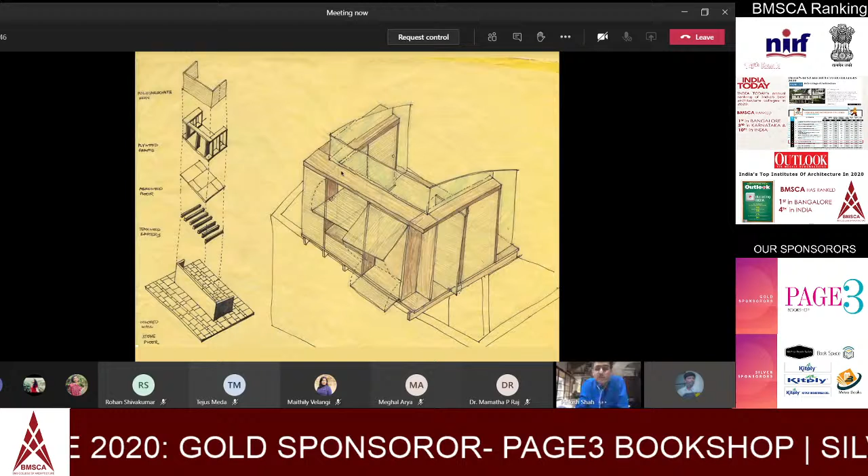We thought, what a fantastic opportunity to utilize that space, that volume within their home. What we did was perch this really lightweight structure on the existing wall. The room in some sense became a toy for the child, a space she could use and manipulate based on her whims, her demands, her moods, creating levels of privacy or interaction based on how she felt.

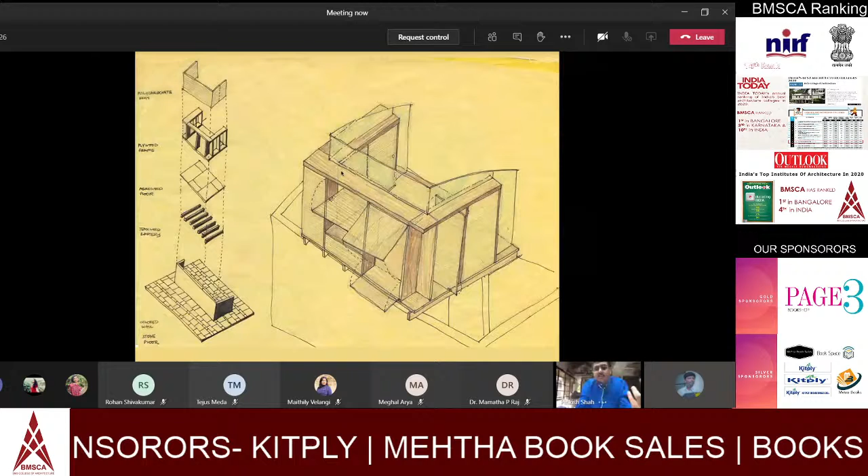Unlike a lot of our projects, these were all the drawings we did for the project, a quick sketch articulating what the whole project was about. There's an existing wall which screened the kitchen from the living room. We perched a series of really light wooden rafters, and the entire shell was done out of plywood made from rubber wood, encased eventually with a lightweight skin of opalescent polycarbonate, which glows with light depending on where the source of light is. A very simple project that becomes a fascinating tool for her to engage with that space.

We tucked away this staircase in the existing space of the wall itself, and this really tiny room pretty much provides for everything she needs, from the bed, the desk, the wardrobe, and everything that kids would need.

The second project is a house that we were called to do, and this project is really driven by the concern we see in society, and the tremendous amounts of waste that we as a society have been generating. You can look at Mumbai as the worst culprit in that sense, and this is expected to keep rising year on year. What can architects really do about this?

Is waste really a problem, or can we turn this notion of waste to start thinking of it as a resource instead of waste? Does architecture really have a role to play? Can we change our negative perception of waste that we have? This is especially true in the Indian context.

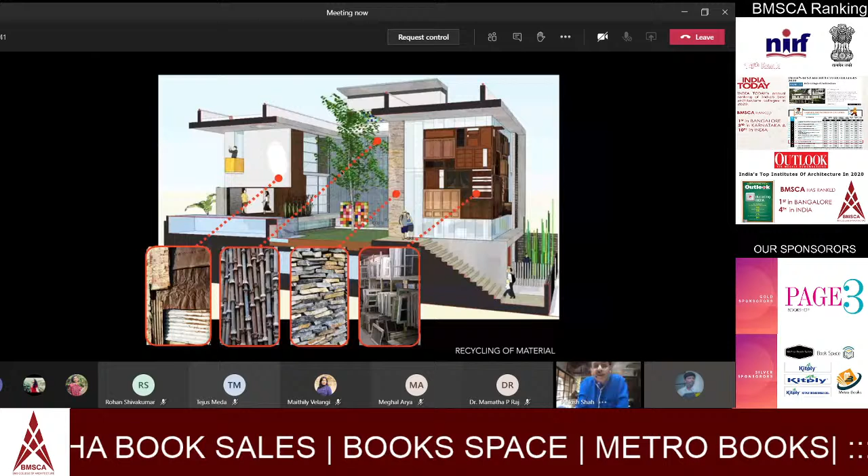So before I go on, there's this quick little video that shows you the context of the house. So I think let it play and I can continue then.

Yes, I think that gives you a quick overview of the entire house.

So again, coming back to this, these were early explorations for the facade, where we are trying to look at the idea of recycling windows, and that's what it ended up being. Similar but very different in some sense, and that process was really interesting.

Because the windows were eventually found by our client over many weekly visits to different parts of Mumbai, and eventually we discovered this place called Deonar, which is in South Mumbai, where everything that's broken down in the city actually ends up in those recycling yards there. And over many weekends we would go there. We actually picked every window and door, would measure it, would photograph it, document it, and figure out a way to assemble this entire collage of windows together.

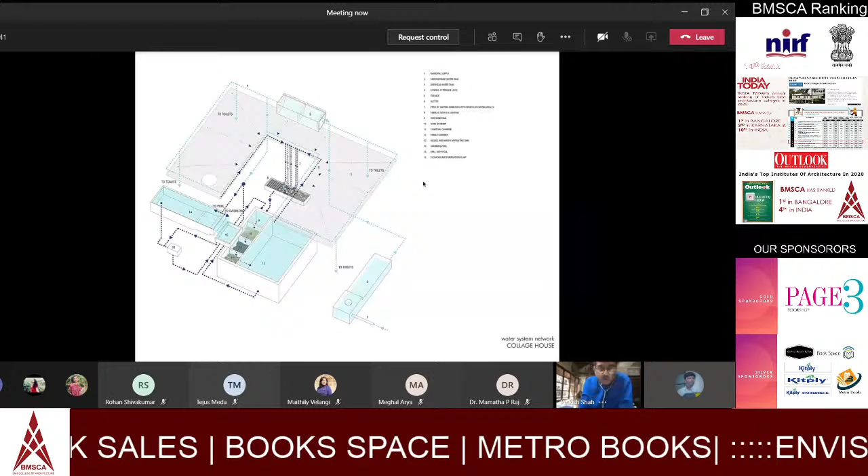contradictory demands, where at one point one is trying to recycle and save water, but also the aspirations of a client to have a lap pool. But I think as architects we can really make these opposites work in some sense, if we figure out a way to carefully create the system where the water is channelized from one source to the other and then recycled to allow for clients to have these luxuries, so to speak.

The courtyard is an idea that has existed in traditional Indian architecture. It's a great climatic device which works here as well. In this case, we had 4 generations of families living here, from a 90-year-old grandmother to a kid who was just born, and the courtyard becomes the place which allows the family to negotiate each other, to allow each one their space.

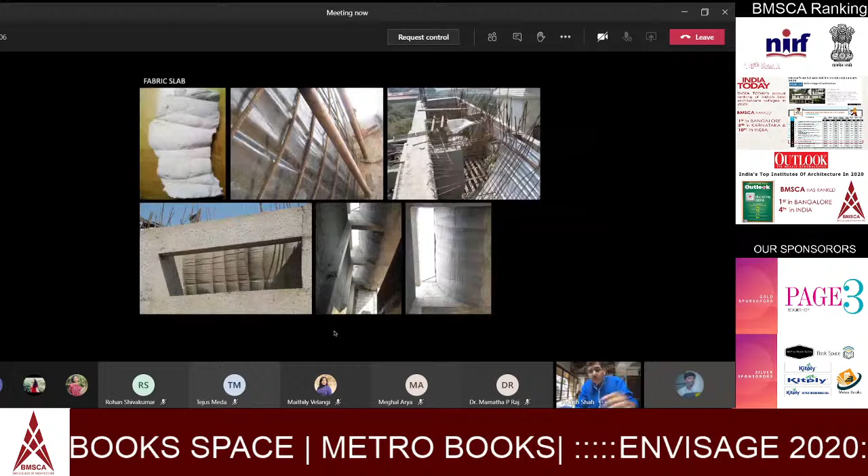I'm not going to get into the details of everything - there's a story behind everything. There's an extensive amount of material and detailing of furniture and architectural elements with a variety of different materials.

They're about 100 years old, from houses in Kerala. They get used structurally, actually bolted to the columns below, with steel stub columns above, to create this fascinating pavilion, which is a real contrast between the old and new.

The wood begins to contrast with the steel, the stainless steel of the roof, and the glass of the pavilion itself. That's really a place that then gives you these views outwards to the water's edge.

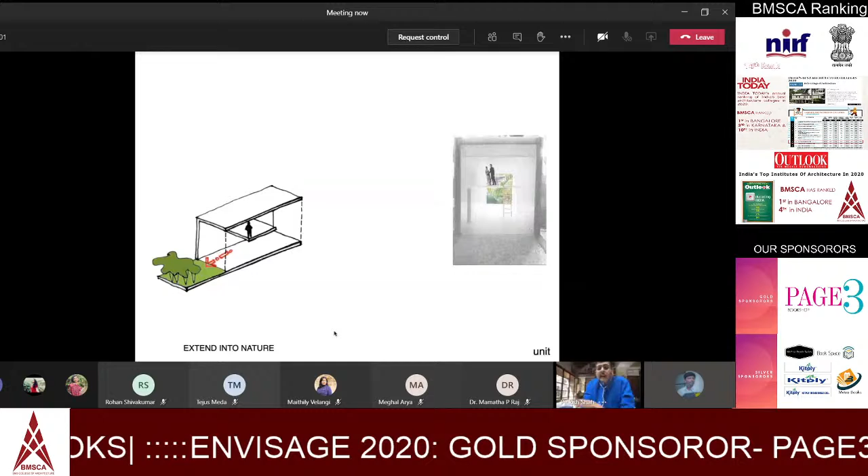Added to that idea, we said, what if every home actually had a garden, however small it may be, attached to itself? So these three things became the fundamental building blocks for the housing.

We used that to structure five different sizes of units, which went from 40 square meters to 195 square meters, becoming as big as a villa within the whole community. So it's like a 1.5-bedroom, 2.5-bedroom, 3-bedroom, and then a 5-bedroom, giving this variety of unit types that emerge.

What we did is that all of these different types are very strictly controlled by a module that governs them.

There's a 3.5-meter module that controls everything, from the offices and shops to even the banquet hall, which became part of the public program. In the initial stages, the idea was to produce these modules off-site and then get them to site in a prefabricated manner, installing them in some sense. That didn't happen because the scale of the project wasn't that large, but they still have that, which creates a wonderful scaling across the site. So no matter how big or small your home is, you seem to have a uniform scale that begins to govern your experience across the site.

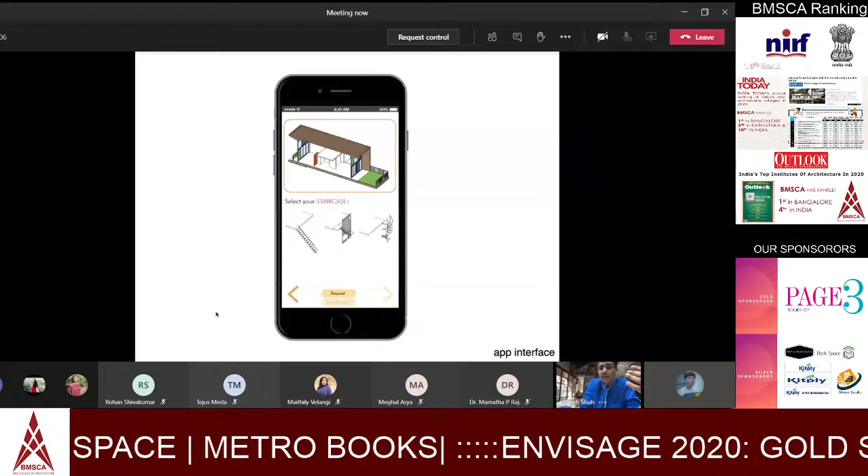What really happens is that you could pick from this matrix to create, in some sense, your own version of your house. What we had suggested to the client was to actually create an app that becomes interactive, allowing home buyers to keep playing around till they could figure out for themselves what is my house, or what is the ideal version of my house. Here you can see they're actually able to pick each of these components till they produce their own version of the house they can call home.

So what we did then is start with this very basic unit that I just explained, this 3.5 meter by 10 meter unit. What that does is grow an arm which adds all the service spaces. It interlocks with another one of these, creates a service court within. We quickly array those across the whole thing and open these out in the middle to allow for vision, access, and breeze to pass through. We stagger these based on site conditions, based on the location of a tree that may come in front of us, or to make sure there are no overlapping views, and then stack these on the upper level.

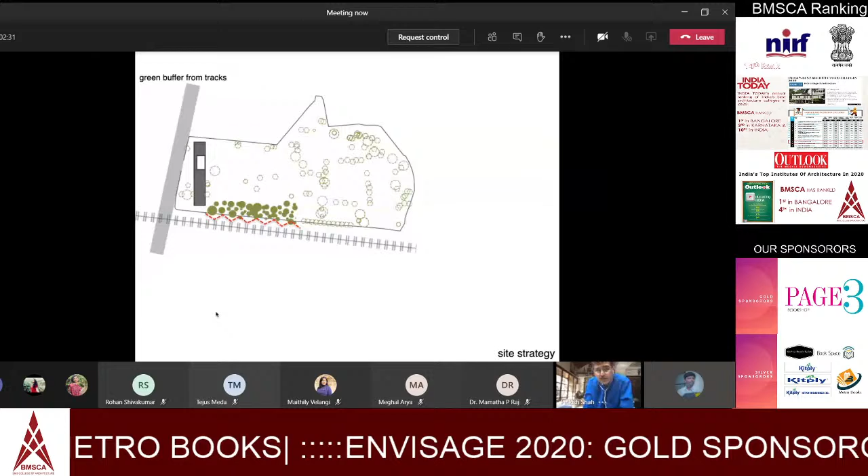The client had this perception that units very close to the railway line would not sell, so we set them back a little bit by creating this green buffer. And what that really does is create this street in the middle, done pretty much like the units I just explained.

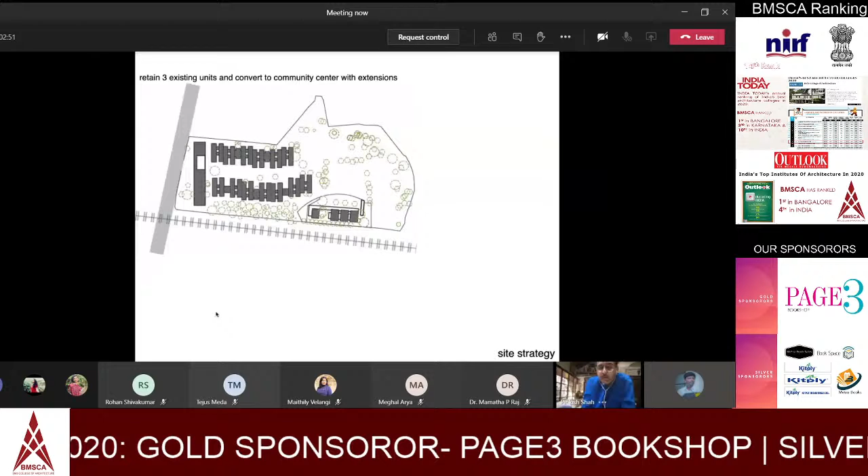The 3 you see on the bottom there are actually the 3 units we managed to save, which became a small community center there.

The back side of the site, which I explained was 1.5 meters above the general level, became this raised rear courtyard around which more units were arranged. So you got this configuration of a street and a courtyard that configured the site.

And the larger villas then sat within that. So you have this mix, this multitude of varied housing sizes, all interspersed across the site, and this balance between private open space and public open space.

You can see that the yellow, which is the public open space, is largely contiguous, which people could use, both vehicular or allowing you to traverse the site as you feel across the entire thing.

And that's at the end what really emerges - that's the site plan, which shows all the different components coming together, with that scrolling section at the back, at the bottom, which you will see slowly rises to become this raised courtyard in the middle at the back of the site.

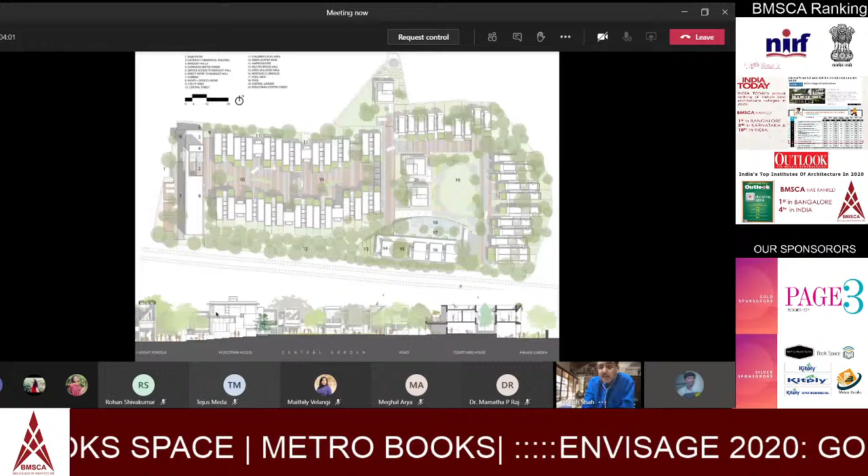So quickly running through the photographs, that's the entry building through which you enter. The left side is actually the banquet hall area, which you could enter independently without disturbing the community. And these exposed staircases, which we created to take people up to the multiple levels.

More details of the entrance building itself. These are the banquet halls themselves, looking outward from the inner space. This is the upper levels of the shops, of the offices, where we've used these colorful super graphics to draw attention to them.

And these are the units as they build out, and you can actually see the modularity or the regularity of the tubes themselves, but the infills on them are all varied - you have this concrete railing or a metal railing, or a Corten steel screen, or a wooden screen, and this kind of variety that exists.

This is the central street. At the center, roughly at the center, we connected them across with a pergola to break that scale of that linear street.

And on the right, you can see these bridge units, which are connected at the top but completely open underneath. Each of these bridge units leads to a small play area for toddlers with slides and seesaws and the like. Each of the houses is entered through this small little porch on the outside.

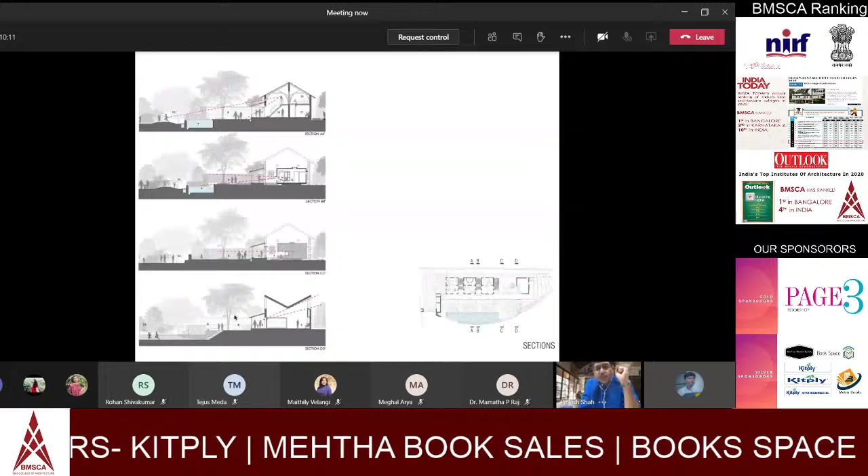These are sections cut through different parts of this. The first one shows the new addition of the loft and how you're able to get this relation from that loft and the lower level to the pool deck, the pool, and that green space outside. The second one shows the small connecting units between the existing houses, where the views open out only when you sit down over there.

And the last one shows you the kind of expansive outward views that you get from within the new addition of the multi-purpose hall itself. So that's the plan and the elevation of how it all comes together.

This basically accommodates the central area, which is like a wet zone. There's a steam room and a sauna and changing rooms, typical requirements for things like this. And there's a space to exercise.

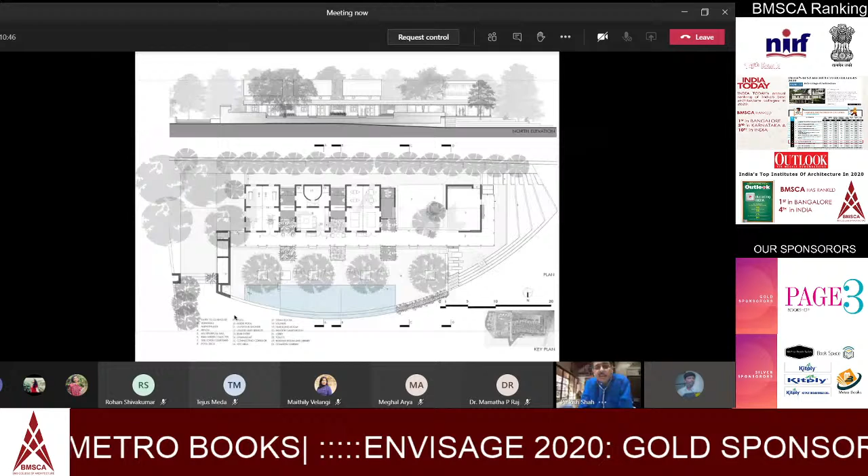You see those three buildings all connected by that linear veranda opening up onto the pool deck, and then the pool itself spills over into that green space. So the veranda then becomes the most important thing, not the building itself.

Really interesting here, because all the stone for the veranda, the bases, the wood itself, the columns, the rafters—everything was repurposed from the demolition of the old buildings that existed on site. So we were actually able to create this entire addition without using much new material, except of course the new hall itself.

So we were very conscious of the new additions. We really wanted them to contrast and stand out from the older stuff. So they're made in board form concrete.

You can actually see the casting of the concrete in these thin 4-inch strips. And again, the scale changes at every one of these units. Only when you sit down are you able to relate to this outside space. So there's this sharp contrast between what is old and new.

This is the new addition, the loft that we added here. You can see that the two trusses on both sides are connected to a steel member that is suspended from the top. This is the addition of a new steel loft and a steel staircase.

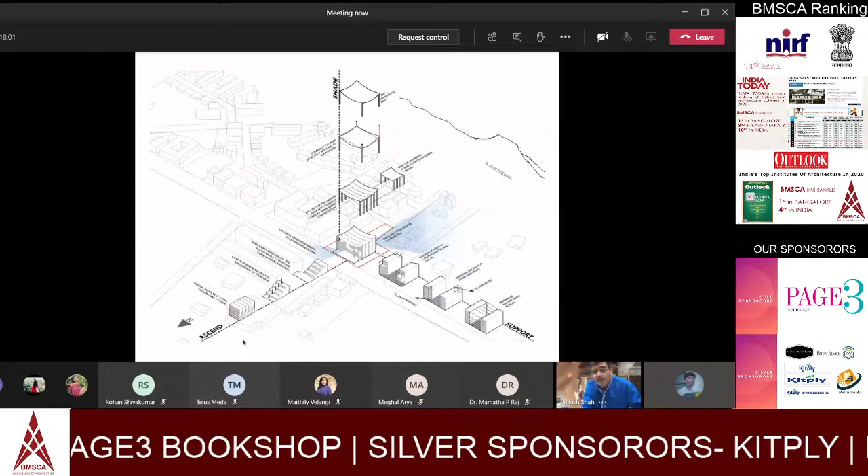The upper, if you see the vertical strand, is basically talking about this idea of shade under this kind of canopy, which protects and shields the site in some sense. The one on the left begins to talk about the idea of this ascent upwards, looking at the series of terraces that slowly take you up the mountain, from where you can see the blue opening up of views towards Ajinkyatara.

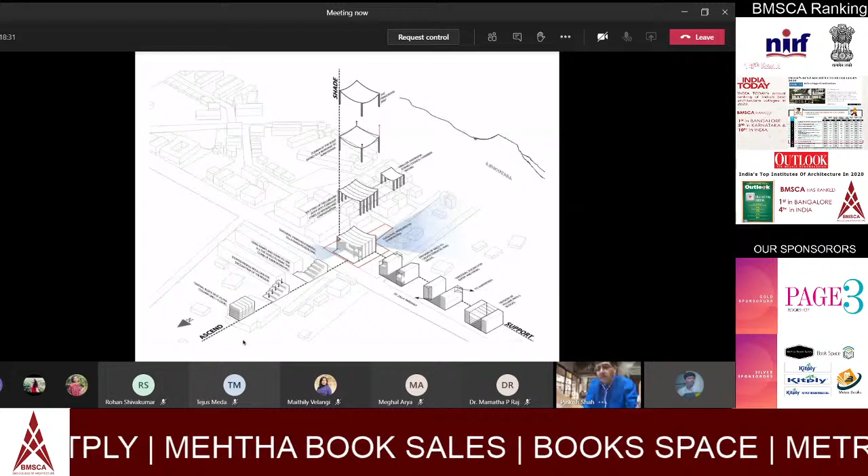And then the building, in that sense, is supported, or governance is supported, by these two arms on either side, which are just this armature within which democracy in some sense plays out. So that's what we came up with.

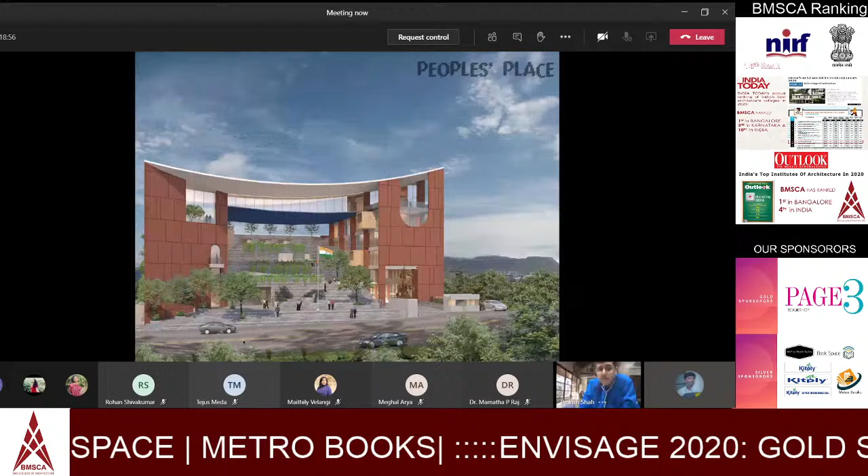Like I mentioned, these two arms form a light-looking roof which sags above, and the central space is completely open to the public 24/7 in that sense. So the offices could actually shut at night, but the plaza and the terraces become a place for people to gather for events, functions, or just become a new place for the city to meet.

So based on all the requirements that they had given us, we clustered them into these 6 broad volume categories, taking VIPs and restricted security access right to the top, but at the same time opening up the lower floors to very public amenities, which then kept staggering and moving up the entire building.

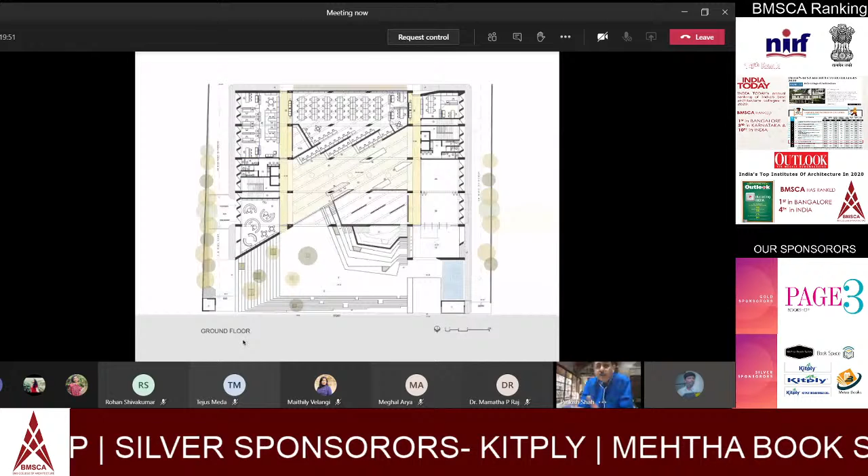So that's the ground floor of the project. You enter through this flight of steps, which creates a plaza in the front, and till that red line, that entire place is very public. So we introduced new programs like a children's civic library, where this fear of the government is something you can start beginning to remove.

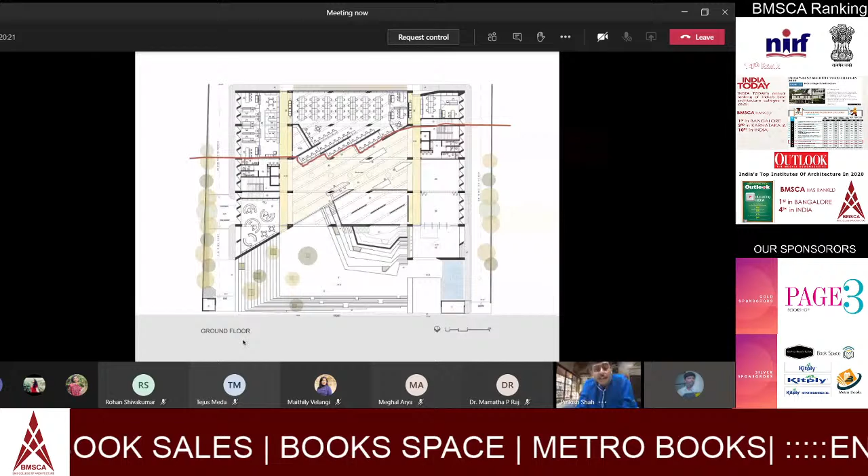In children. This is not something that was asked for in the brief, but we thought it was important. So the left side becomes a kind of library that children could come to and learn about governance and things like that. And then there were these halls on the right side which became multi-purpose spaces for citizens to come and hold events and functions.

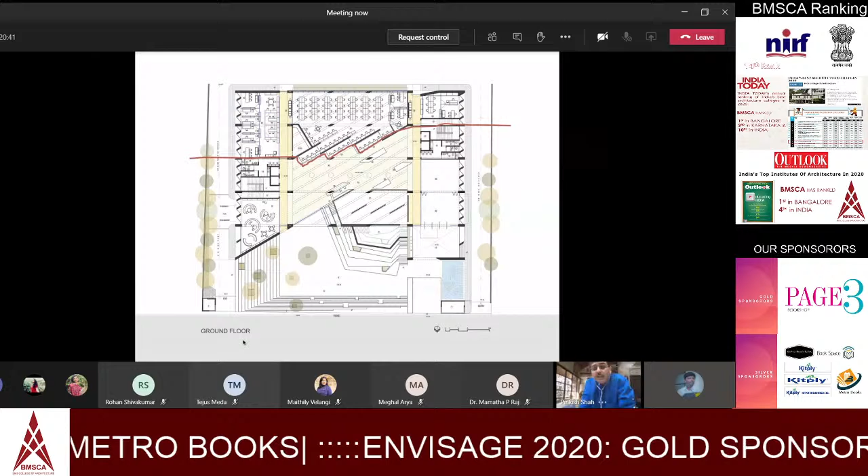There's a gallery space also in the middle, and beyond the red line is basically security-driven spaces. So they had a very large requirement for storage spaces, for a lot of filing and dead material in that sense, which we did very carefully—we hid that below the staircase that is running up through the center.

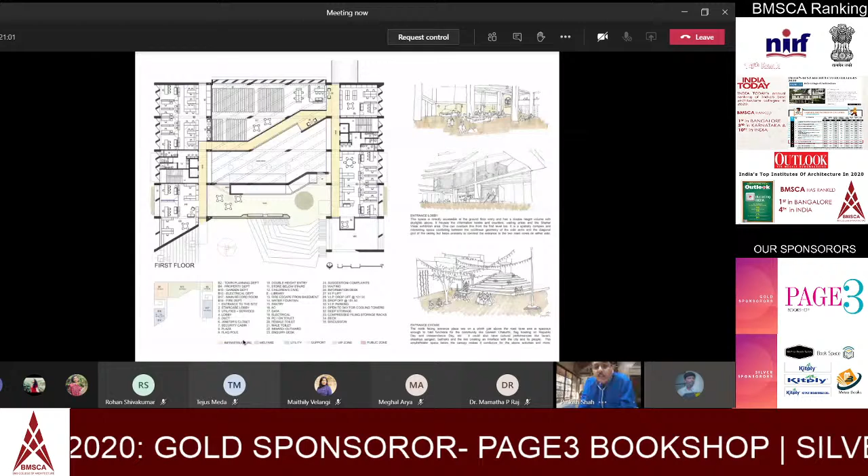So that's another view of the same, and you see in the central part of the building where it becomes just a large place for compressed filing.

Interestingly, the two cores are not symmetrical, so we staggered them a little bit, as in the top right diagram. So you create these smaller neighborhoods within the office—you have a very large space, a medium-sized space, and a small space. You don't get these anonymous-looking endless office floors that have become de rigueur in most corporate projects.

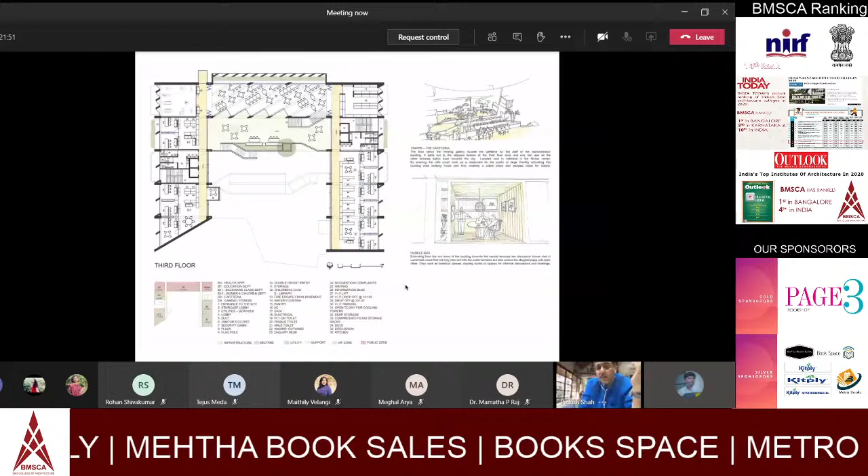And you begin to climb up, and right at the top, one last floor below the top, we programmed the public restaurant or cafeteria as a public restaurant, which could remain open after hours as well, drawing people up to that place.

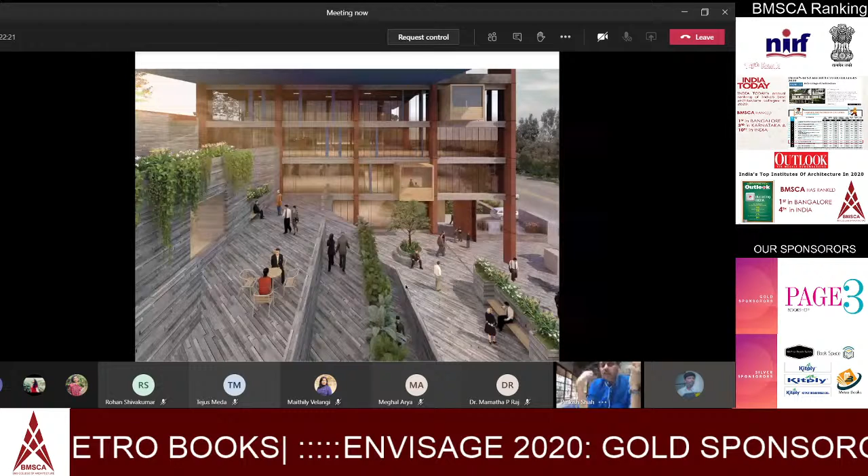These are some of the public terraces. The idea here was very simple—that Satara has a beautiful climate, and the idea was that this could draw people from within, government officials, out onto these terraces and decks to actually start communicating with citizens, and citizens would feel less intimidated by having to step into a public space.

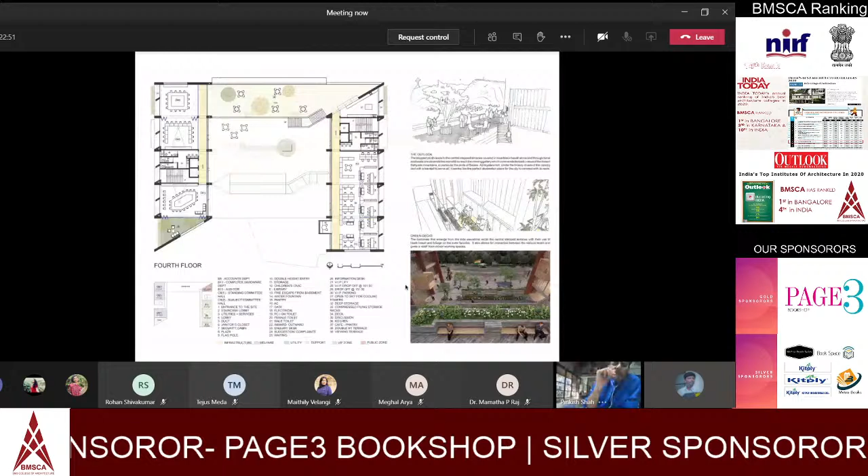Also, the thinness of the building allows you to look right through these buildings. You almost make governance transparent, and you make governance at work visible in some sense to people around you. And then this is the plan where you reach the final terrace and the building actually just cuts away, opening up those views diagonally up towards Ajinkyatara Fort.

And the top two levels, of course, is the chamber itself, along with all the VIP activities and that's really what happens on the sides. And the stepping notion of the inside is then begun to be reflected on the outsides as well.

Last project, very, very quickly, going to run through this. This was the first project that we ever did. This is 20 years old now. I just pulled it out of the bag because I think there were some important lessons for us that we learned here.

And how does one really make sense of this? How does one create a city out of fragments like this? I think what this project demonstrates is this really micro fragment of the city—that what one needs to begin to do is not really look at the solids, but to really start looking at the voids that are formed in between these buildings, and how the voids formed can become more meaningful.

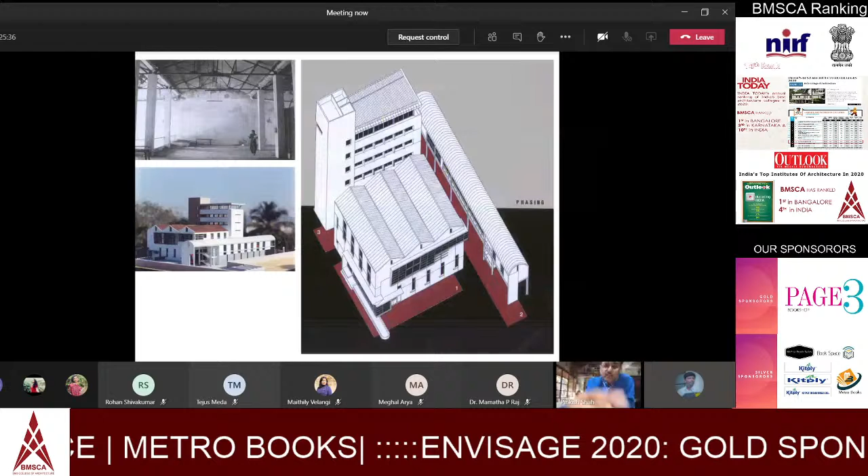Then we said we can take the additional time we have to actually create two more buildings. You can see that in the drawing which shows phasing, or the model image. We created one tower, and then a smaller, thin, long utilities building. So the three buildings are all different. The middle one, the plastics factory, becomes a combination of steel and an existing concrete building with additional floors and movement spaces in steel. The utilities building is an all-steel building, and the tower is an all-concrete tower.

It was fantastic learning for us to look at all these three things, but it also shows you how three different building types can actually coexist.

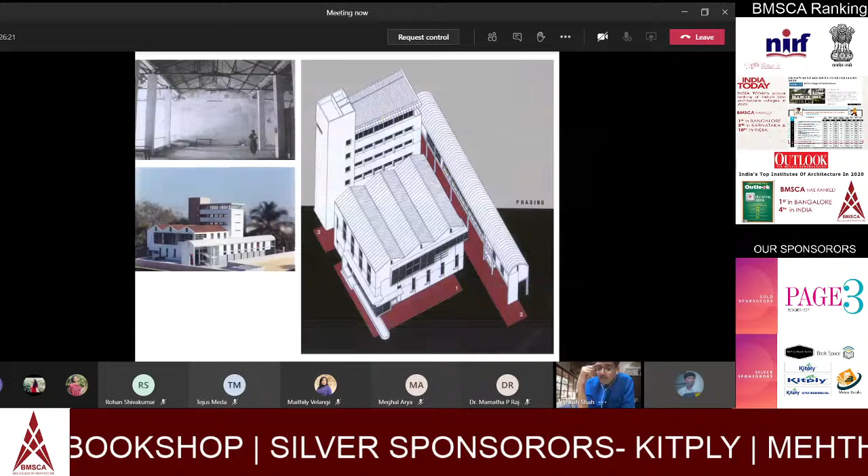What is really interesting, picking up again on the hybridization of the program, is that all three buildings at the lower floor work as a workshop. It's a very interesting model - an automobile finance company that is also into leasing of cars and maintenance of those cars and others. So you have a workshop, a very blue collar space which is greasy and relatively messy, but you also have people dealing with finance, in ties and suits, sitting on some of the upper floors.

The tower then became a space the company saw as a space they could expand into as they grew. So whilst we did it, it was actually rented out to a software firm. You begin to get all these multiple hybrid programs sitting on one site together.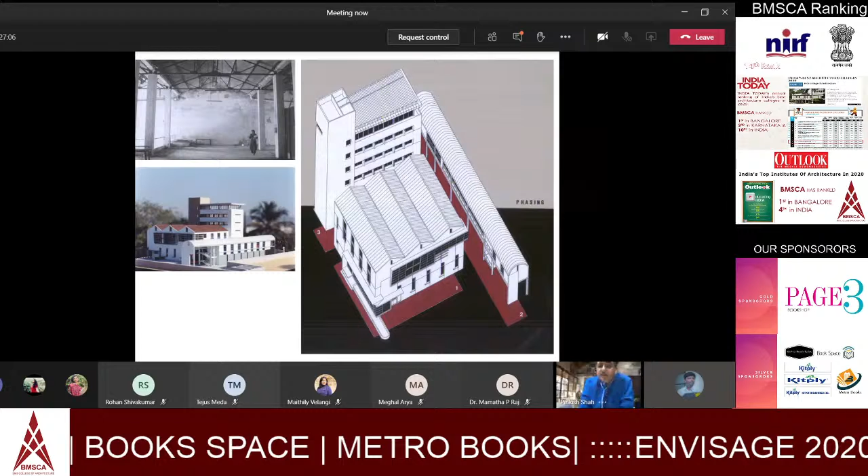I think that was really interesting for us, doing this about 20 years back when we had just come back from the US after working and studying there.

What we realized is that the factory space was this very generic space, and it would see transformation over time with modular furniture being configured and reconfigured constantly. What we thought was very important was to define that, to have things which would really hold this space together.

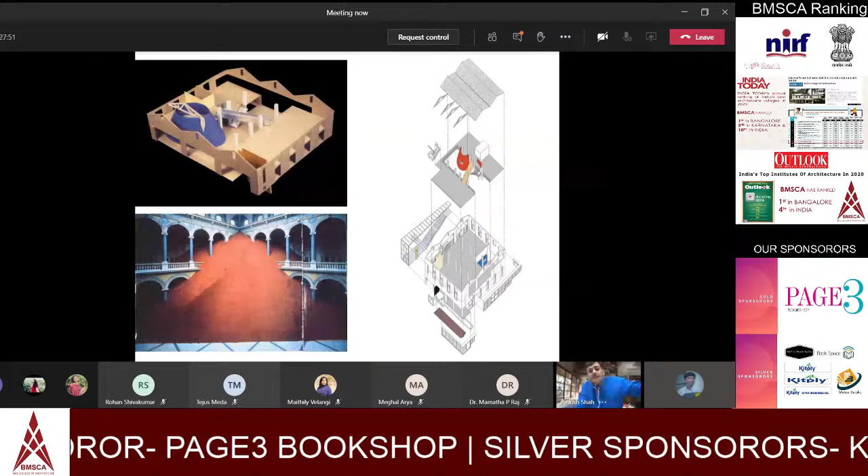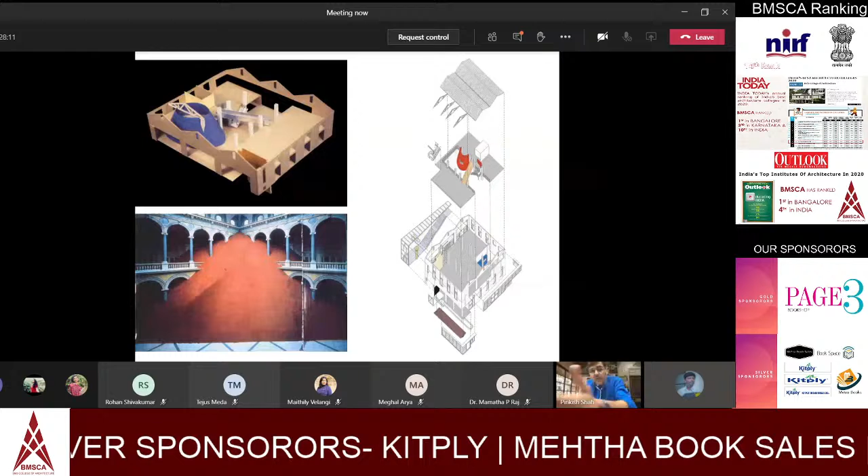We came up with this idea of these totems, these totemic objects placed within this large volume, which then in some sense, even though they contrast with the volume, actually call out the nature of the space far more. It's very interesting because we discovered this image by a Czech artist who had created an installation within an old building, and what we seem to have done is very similar - this was actually found post fact, but interesting.

Here you can see the section of the tower and the older industrial building, and that little space in between, which basically becomes an entry point where you can begin to go to all these three different things.

These are some of the objects we introduced. Everything newly done within is done in steel, fully exposed. We've exposed all the trusses, the lighting, the air conditioning, everything is actually exposed here, and so are all the additions in detail.

This is like a bridge that crosses the central atrium, and it's all structural. Every bit you see has a structural purpose in some sense, as well as the detailing of the staircases and the bridges.

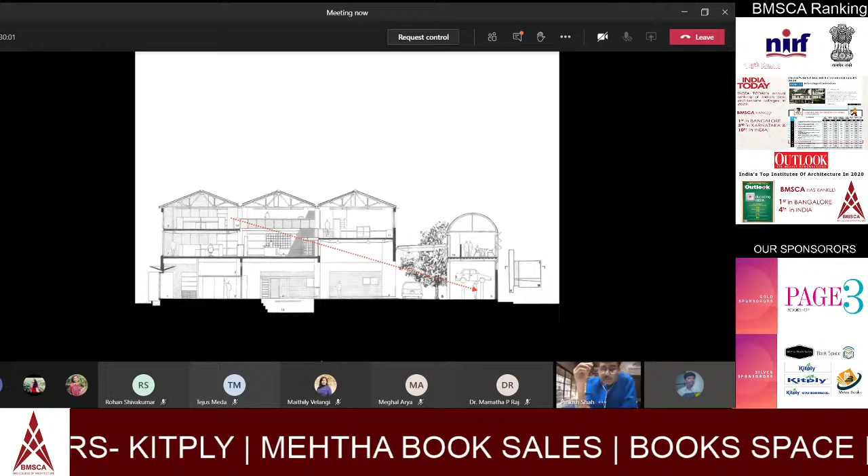This was something the CEO of the company told us in our very first meeting: that at no point do I want the white collar workers, the corporate staff, to forget that they exist because of the workshop and the maintenance that we offer our clients. So there's this continuity and visibility.

We talk a lot about visibility of the other now, and about trying to blur boundaries between different classes of people. This was something we had done very consciously, where from the office space above one could really participate in the goings-on of the workshop.

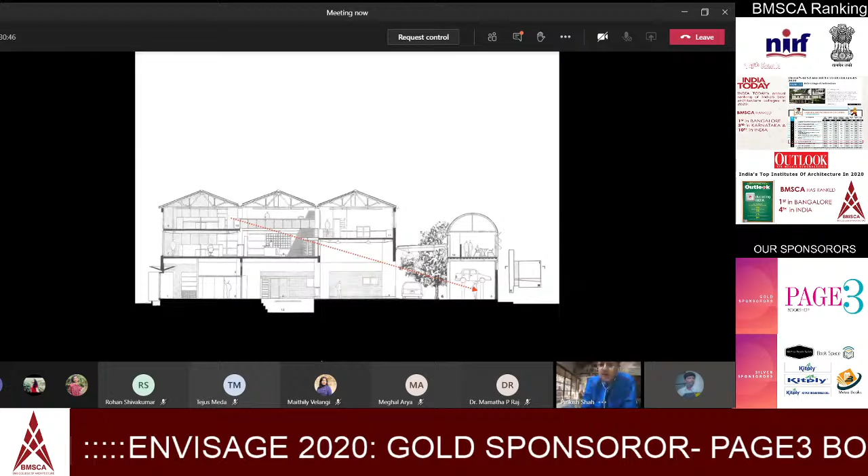You can see that on the bottom right of this image, like cars being repaired below. So this blurring of boundaries between these different parts of the office happens in some sense.

This is the utility building, a simple vaulted space, linear passage, and again it looks down into that space between the buildings. This is a section cut through that gap between the tower and the older plastics factory.

What we've done is thread this staircase that takes you to all three buildings. You can go right or left to either building, or climb up and enter the utilities building here. So it becomes this distribution point to go across all of these spaces.

You can see this is a skylit space. It becomes like a street, a public space where people hang out, with these bridges crisscrossing all of them. This is from the other side, and that's the tower.

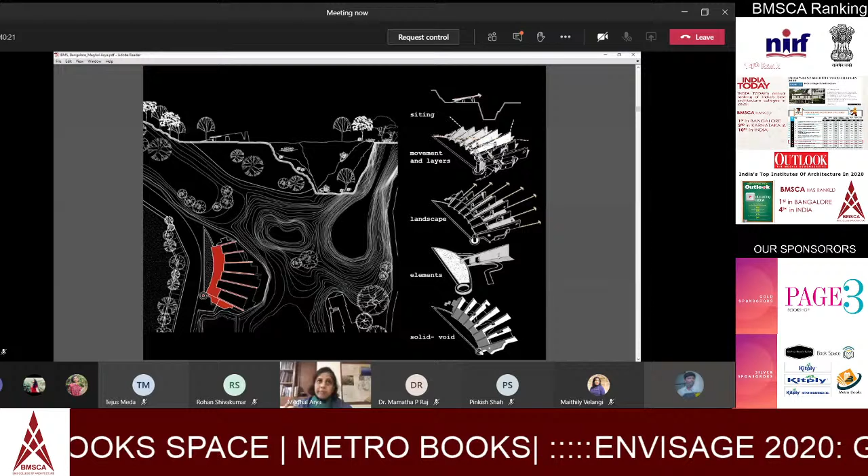One of the things the government of Rajasthan wanted to do was create a tourism circuit around the life of Rana Pratap, a king in the Mewar region who was always on the run, and one of the very few kings in Rajasthan who did not have an opportunity to construct anything. He left behind no edifice or presence of his rule, and yet he was one of the most celebrated of all the royals.

So the government wanted to capture his life by marking specific locations where significant events occurred, including fights with the Mughals or where he was coronated. These two pavilions are located in such sites, which are actually in the middle of nowhere. For us, it was about interpreting the life of Rana Pratap as something very simple but frugal, lived with a certain degree of hardship and robustness.

We designed the first pavilion as a series of 7 walls, interpreting his war with the Mughals, which happened across 7 valleys. These 7 walls have been constructed overlooking the valley, and on the other side you have the hill, with the building sitting between these two realms, creating a tension between the inside and the outside, something built and something not built, trying to recollect or create a sense of a ruin.

So you don't really know whether this project is complete or not. In fact, one of the MLAs of the area asked us when we were going to put some chhatris on top of this to complete the project. But this is it—this was how it was meant to be.

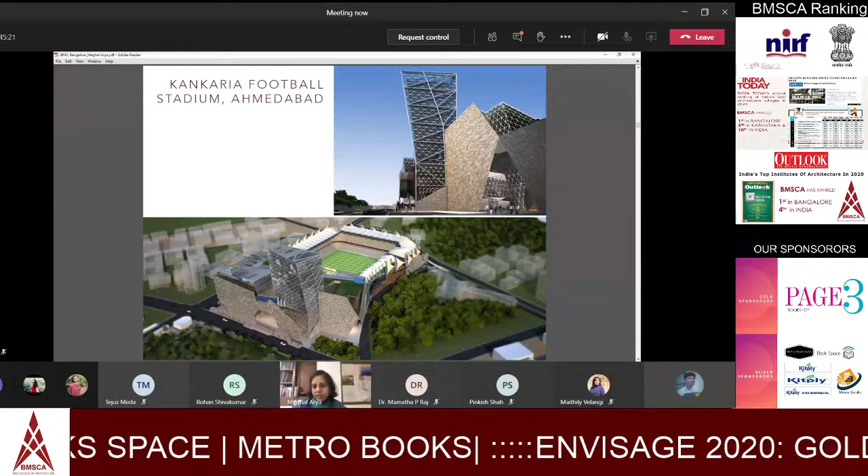One of the most important learnings we got from this project is to be able to handle a large variety of aspects that bring architecture together. So you had something like 35 odd consultants trying to help put together all kinds of services, utilities, technology, materials, even sports advisors, and to be able to communicate with all of them, integrate their requirements while still asserting a certain quality of the spatial configuration, while ensuring that in the scale and largeness of this project, the intimate and the human is not lost.

This was a fantastic learning for us in how to look at the idea of hybrid programs. You have a sports facility, but then also hospitality, a hotel, a multiplex, and a sports club. So the idea of hybrid program also became a very important learning for us in this project.

This project, however, remained unbuilt, but we took quite a bit of learning from this into our next set of projects. Most of these next projects are in the realm of educational institutions.

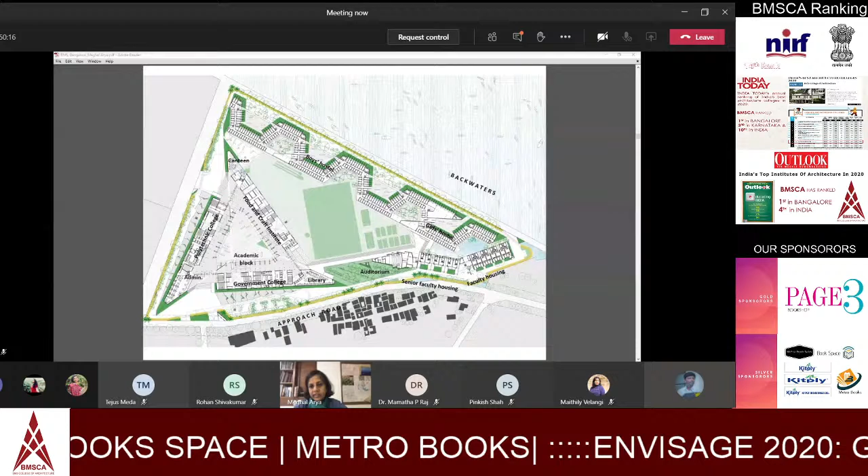We were hoping to break this notion of individual silos and create connections to foster multidisciplinary learning. This is not something that happens easily in government institutions, and we hope architecture can enable such learning. On the other edge, we have the hostels looking at the backwaters, creating smaller courtyards. On the lower end, towards the urban settlement, we have the faculty housing that would connect them to the other residents of the area.

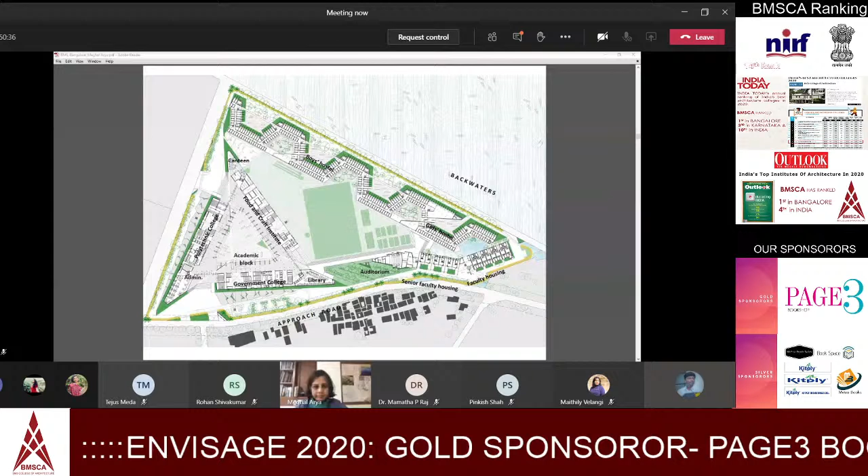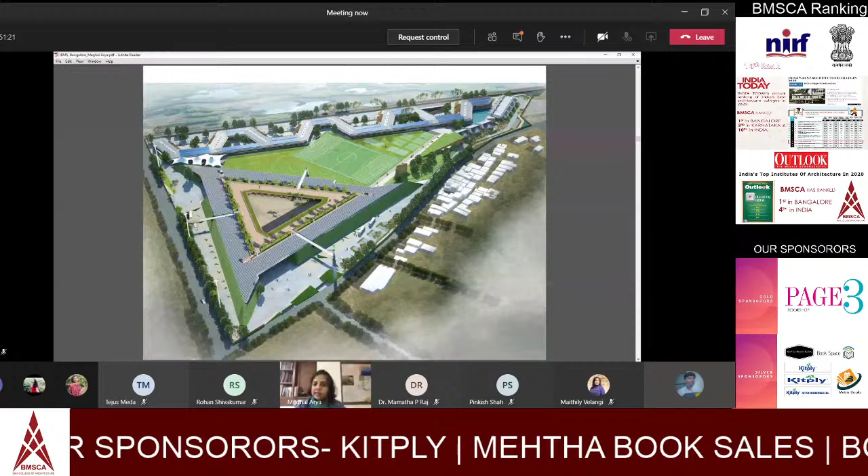In terms of the massing, we had to take care of a few things. One, this was an island frequently hit by cyclonic winds, so we had to keep it a highly protected environment, which means we made this highly introverted. We also kept it very low because it came within the cone of the airport, so you couldn't rise high. This was a very low two-storied building spread on the ground and yet compacted enough to create spaces for sports facilities for these young people in the college. Those sports facilities also became a way to separate the residential area from the university area.

And finally, you have this internal courtyard with many semi-open spaces looking into it, and you can easily imagine students moving through these spaces, walking through the courtyards, creating an environment of learning and college life.

We tried to work a little bit with materials in a way that would not be simply paint and plaster, which is what most government officers were used to looking at. It was quite a bit of effort to bring in exposed RCC to create certain patterns that would create an environment of diversity and a visual palette for the experience of the students. These cross connections across the courtyard and through different spaces were also hoped to be a way where you can talk about learning beyond the classroom.

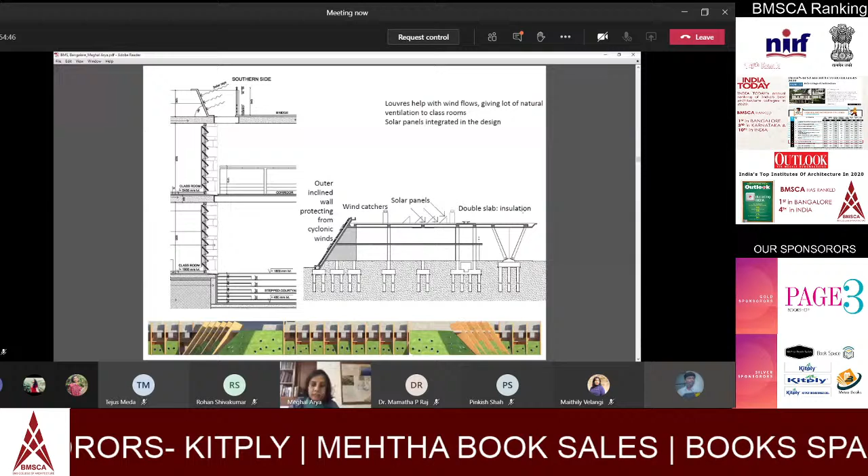We also put in place certain measures for other climatic conditions other than the cyclone. We put up some solar panels for harvesting solar energy, and we've made sure that most of the spaces have protected doors and windows so that the lashing during the cyclone is not very harsh on the building itself. We also have a double slab on the topmost level for insulation.

Once again, a large open space for the gathering of students.

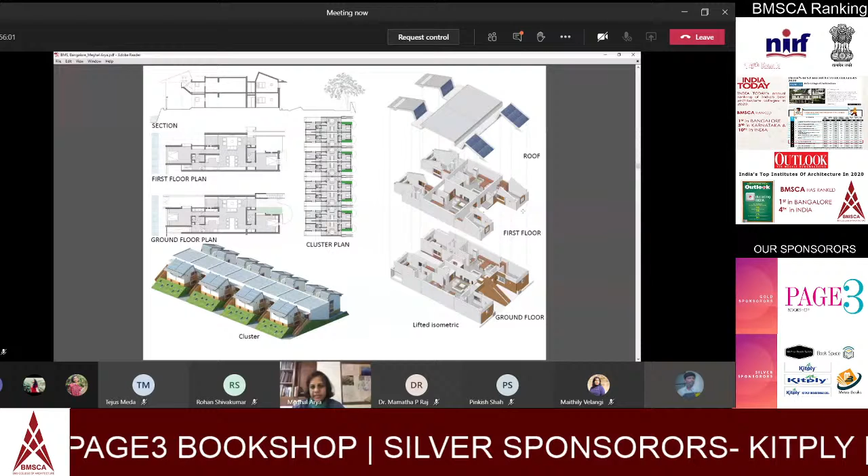We also had to do the housing in these projects, so this was the housing for the faculty, small clusters, and it followed the same language of protected inside with these landscape mounds, which to some extent also referred to the fort on the island. These were known as the tenement or twin units, which shared walls in order to reduce the impact of the heat and yet give a continuous flow, because this is once again a hot and humid climate.

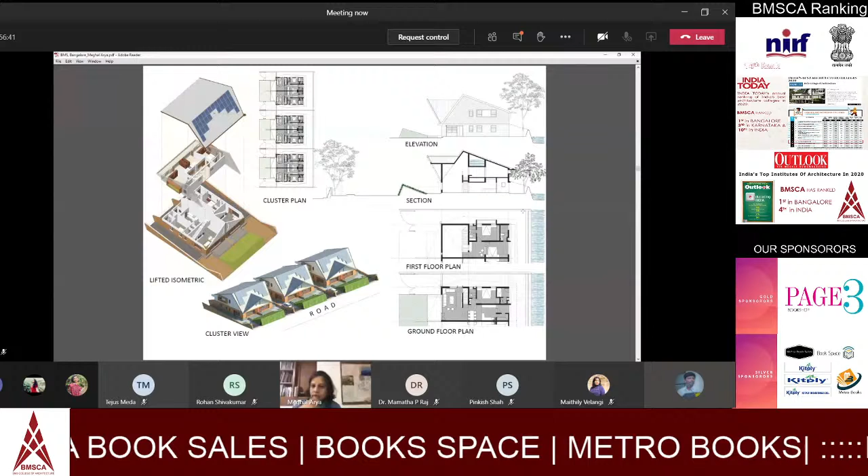And they had a shared staircase from outside. This kind of space which is created is a double volume with a space looking in, the water tank incorporated within that, and all of that in a way becomes one singular unit. This is for the larger faculty housing.

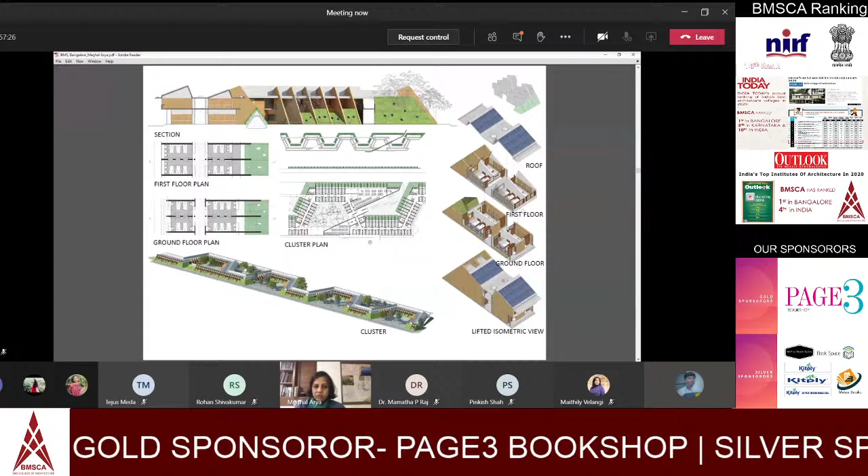And finally the hostels. The hostels were also designed to have their own small courtyards which opened out, although it's a doubly loaded corridor with the problems of all doubly loaded corridors. We've tried to ensure there is enough light and ventilation within the rooms, and the interaction space between the girls and boys hostel becomes the dining area. So on one side is the boys dining, and on the other side is the girls dining, with certain controls in between, because that is what was required of the program.

So you get this kind of space for students to hang out after classes and create certain spaces for their evening activities, apart from the sports facilities that have been provided. And this is the internal courtyard with corridors overlooking the spaces.

The other project is a small project in the north of Ahmedabad, again a very hot but not humid climate. This was the administrative block for the Agriculture University in Dantiwada. Since it was an agriculture university, the idea of how the project communicates with the land was what was at the back of our minds.

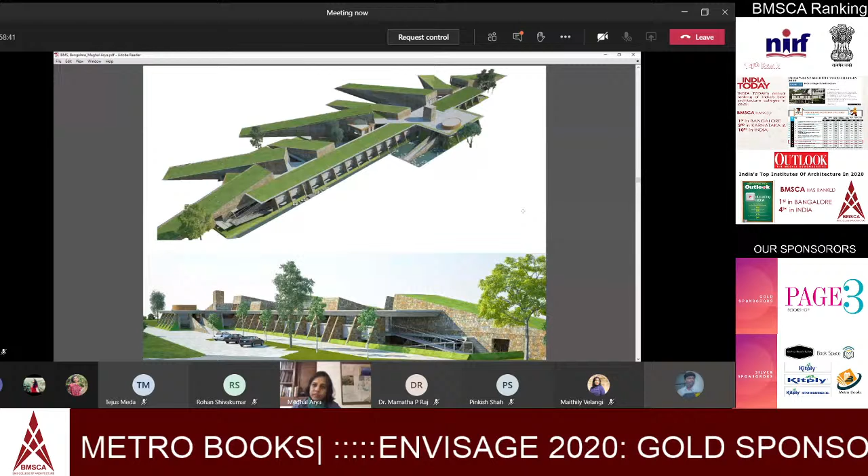So this is what came about as part of the project: one linear passage kind of space, and at the head of it was the Vice Chancellor's space. The Vice Chancellor was to communicate with 7 different departments, each headed by a dean. So those 7 or 8 departments became units which moved into the landscape with certain sunken courtyards.

This took care of the extremely hot climate of Dantewada. At the same time, it allowed the land and the farms to move up onto the terraces, merging the building completely with the landscape. So it almost tried to become a non-building from the side of the farms.

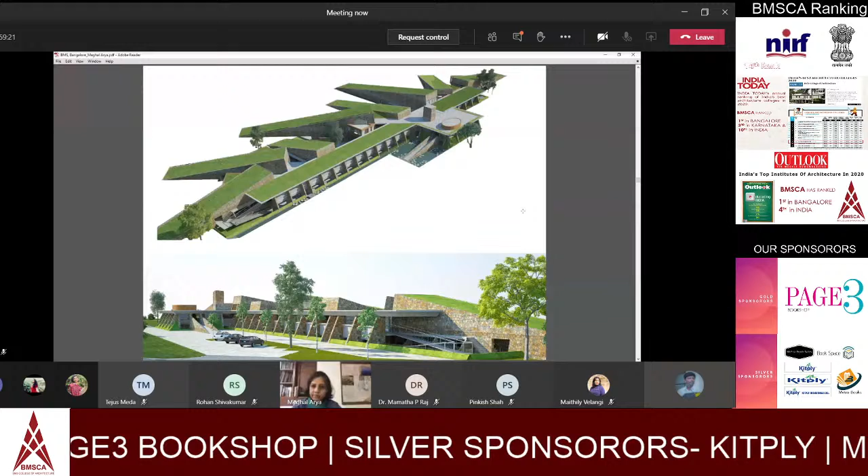And this is how it is in its final form, where half of the building is sunk below ground level. It is made in stone. We experimented with stone jaalis which act as the grills. It's sometimes quite a task to make many government contractors work with this kind of detailing.

But over a period of time, we found that good conversation most often brings them on board, and they are then quite happy to put in the effort to make it work. These are internal spaces, again as required, with a lot of movement. We need to give space for many students who will be rushing around asking for things to be resolved in various departments - the registrar, accounts, and all different kinds of examinations, all brought together here.

So these are the various projects. What I will now do is run you through a few of the competition projects we've done - not necessarily always winning, but still very useful to the office as R&D. We look at competitions as research and development.

There are ideas which are opened up, explored and experimented with. We always keep those with us so that if there's another moment where such an idea can be suitable or relevant, it comes back. So we do a lot of competitions, 2, 3, 4 every year, and maybe you win some and maybe you don't, but you learn a lot.

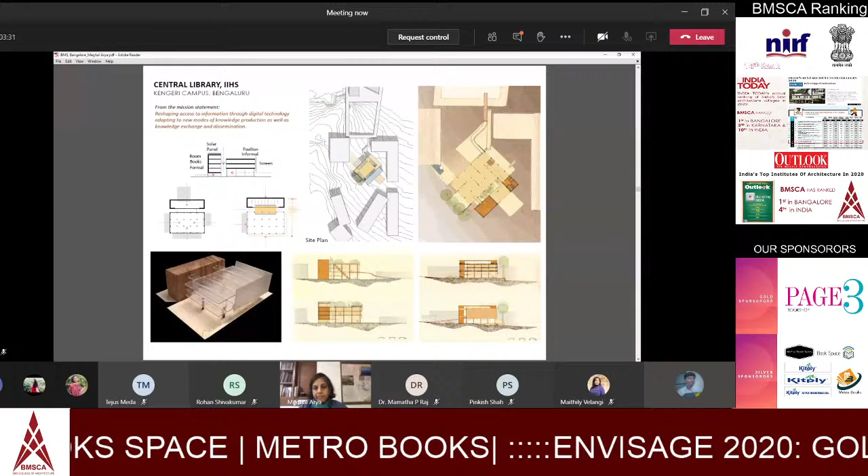What you see in the dark is where the repository of books is, with many levels layered based on material and kind of books, but also in terms of archival material, rare books and rare maps, because this is an institution for habitat studies, so they have a good collection of large maps.

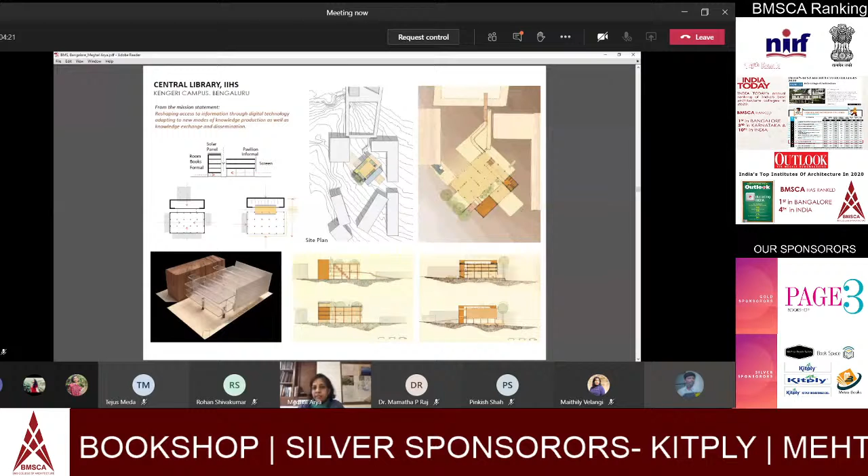Those kinds of things all come in the darker spaces. The lower levels are for interaction and multimedia presentations and exhibitions, whereas on the top layer we have the reading rooms, the reading carrels, and administrative spaces. So it's a very simple diagram, and this is reiterating that for us, from the diagram we add layers of requirement in order to enrich the experiences. The diagram doesn't automatically become the building, but goes through many transformations, additions, and modifications in order to reach the final design.

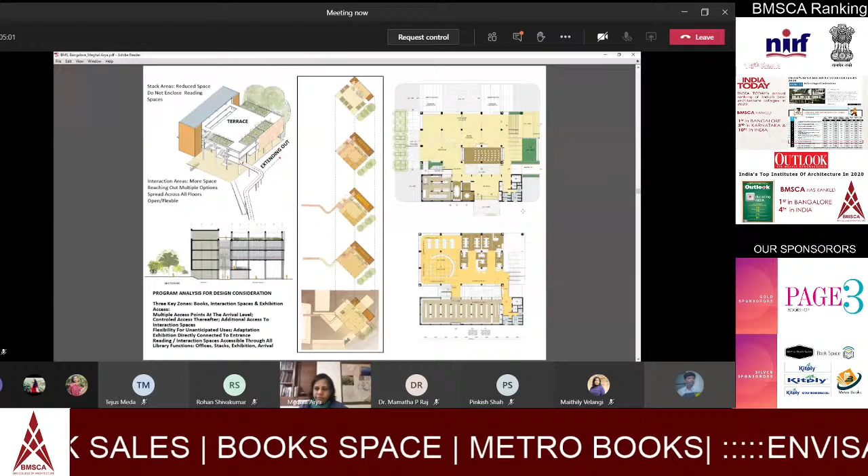This is the development of the project. As I mentioned, we had these various spaces at the lower levels and the books, and on the terrace we are going to have solar panels. It is the ambition of the client to make this a highly environment friendly campus, so we're trying to procure minimum energy from the grid and minimum water. We have a step well which is part of the library where you can sit around, and during the monsoon it will collect water.

This is another competition, at Alang, which is the shipbreaking yard in India, and they wanted to make a museum. We've won this competition also, and we have the work order. We're waiting for the situation and the economy to change, and then we can begin work.

The idea was to be able to find a way in which one can bring in the recollection of the ships that come to Alang, and find a way where various aspects of the lives of those ships and of the workers who work in those ships are integrated within the museum.

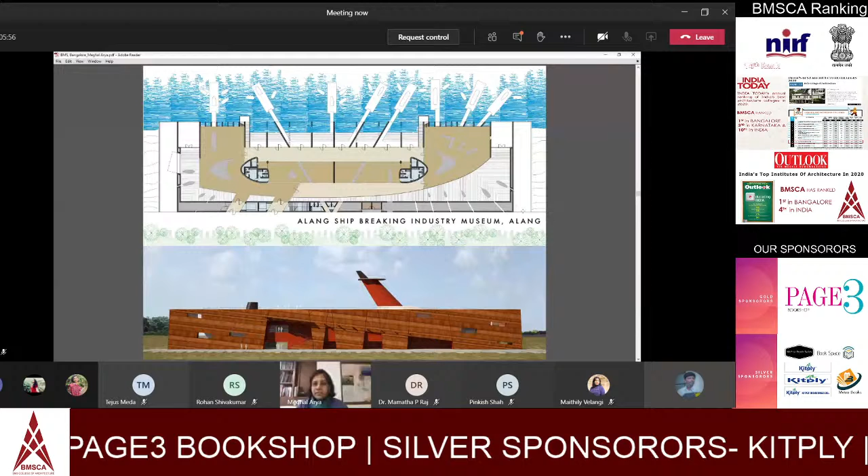We've sited it along a water edge and found a way to recreate some sense of the section of that ship, because if you go to Alang and look at the ships being broken, the cross sections that are seen, as it breaks in layers, are very fascinating. We hope that eventually a lot of the building material will come from the scrap of those ships.

This was another competition that we participated in, for INSDAG, the Institute for Steel Development and Growth. We came third, I think, in this one, where we were looking at trying to explore how stainless steel and its tensile qualities can be explored.

This whole gray box is actually suspended from the central stanchion. So you also then kind of look back on the Kahnian idea of served and servant spaces. The brown box becomes the spaces which are the servant spaces, which serve the gray, which are the main spaces of the project. So this is the kind of work that we put in for the competition.

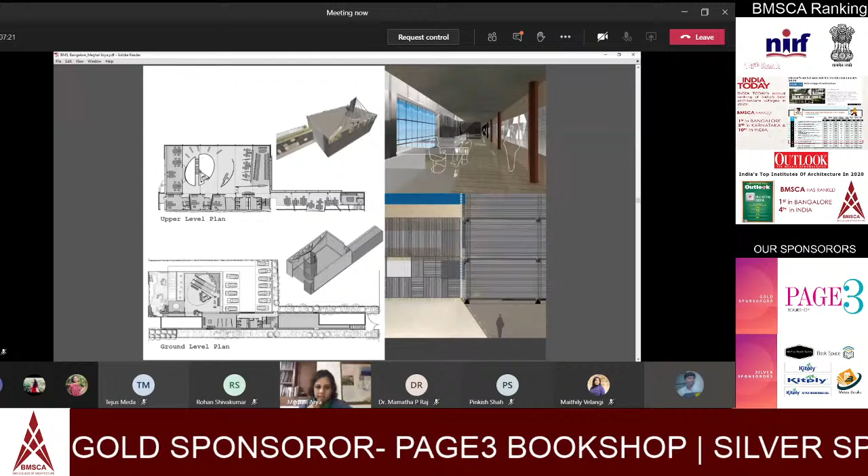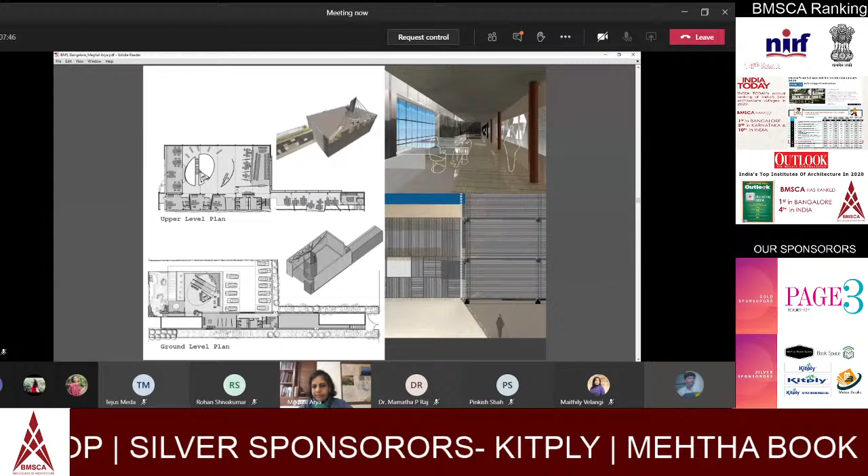From here, I am going to move to a slightly different scale, which is not necessarily architectural in its most conservative sense, but really talks about spaces within the city. This was a competition that we participated in, held in Bangalore. Many of you might be familiar with the Complete Streets competition, which was won by then Janaagraha.

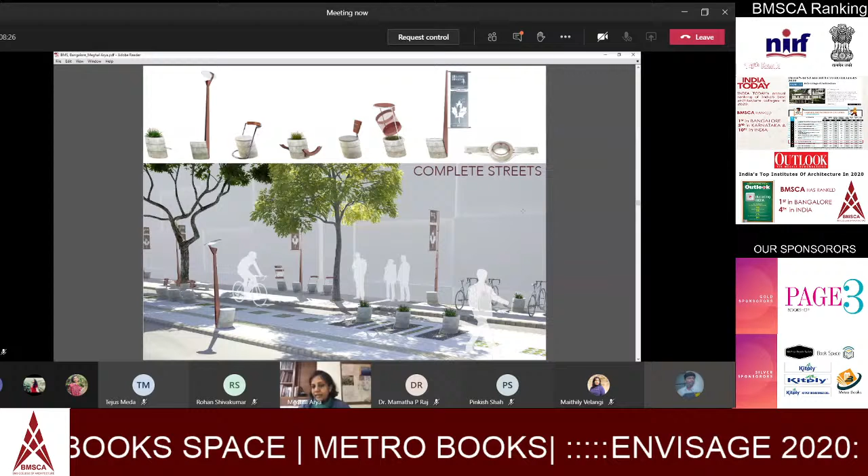We started looking at how do we articulate the edge of the street—between the road and the final private property—to make available a space for appropriation by the multitude of activities that go on in Indian cities. Indian cities are characterized by these layers we all experience daily. The problem is we find them congested because we have to jostle for that little bit of space. We were trying to talk about public furniture, street furniture, and the modularity of street furniture—a particular element which can be adapted to become multiple elements: a street light, a planter, a bicycle stand, a dustbin, a bench, many things.

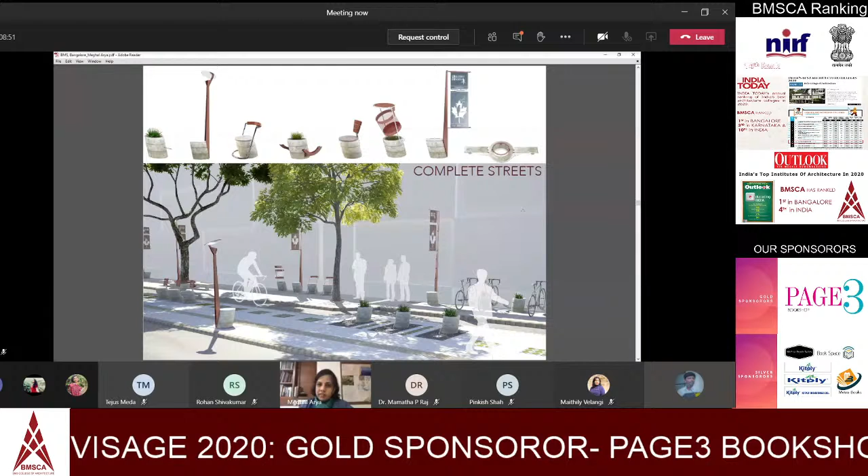One of the things we've seen is that the quality of construction suffers when we do these street projects. We were trying to see if the idea of factory-made products, made under governed conditions with better oversight, can be brought and placed in the streets.

We were trying to look at integrating all these elements to the various activities required on the streets. So far what we were looking at were projects that were a response, like I mentioned earlier—architecture as a response.

Now what we will try to look at is what I consider where architects don't just respond to what is given to them—not just responding to site, context, program—but are advocates of ideas and belief systems. So architecture as advocacy is what we are now looking at, and the next series of projects I consider where, through certain interventions of ours, we are able to modify and change the way we understand our spaces.

Even the project at DEEV had a certain degree of advocacy in it, but most of it was a response to the kind of budgets, the program, the requirements of the client. Here now we're looking at moving from response to advocacy.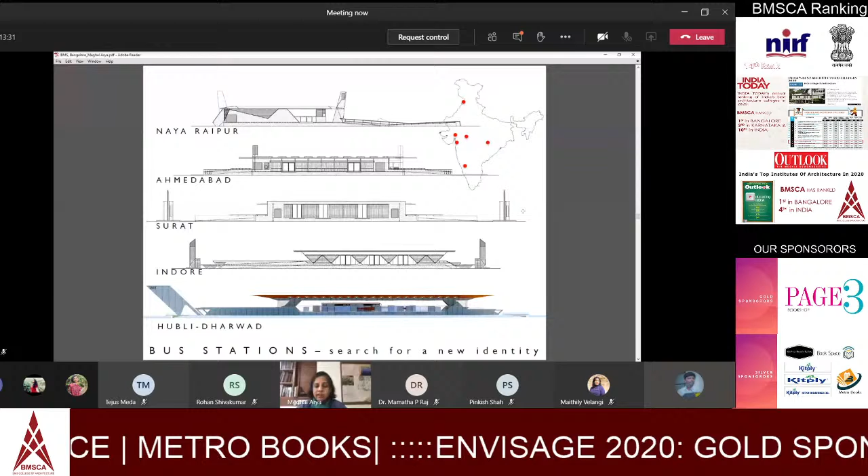It has been found that when numbers are less than a certain quantity per day—less than 2 lakh people—the BRTS actually works in the most efficient way, and many countries in South America have demonstrated this to us. We participated with the group of people propagating the idea of the BRTS, and it started with Ahmedabad, then spread to Surat, Indore, Hubli-Dharwad, Naya Raipur, Amritsar, and many other cities.

The Ahmedabad BRTS was a success story, and certain factors from it were extrapolated into many other cities. Our role was to look at the bus stand as the interface between a planning system and the people. The bus stop is the only visible aspect of the system, where everything else is at the level of roads, policy, and planning. How do we make the bus stand a brand of the shift from private vehicle to public transport? That was the challenge we looked at as we started designing these bus stations.

I will show you two of them: the one in Ahmedabad, which was our first, and then Hubli Dharwad, which was the last one in this series.

The Ahmedabad bus station is designed as a very simple pavilion with a high degree of transparency on the edges, because safety in public space greatly depends on transparency. Jane Jacobs has talked about the eyes on the street—if you have very transparent open spaces, they are likely to be safer and more secure.

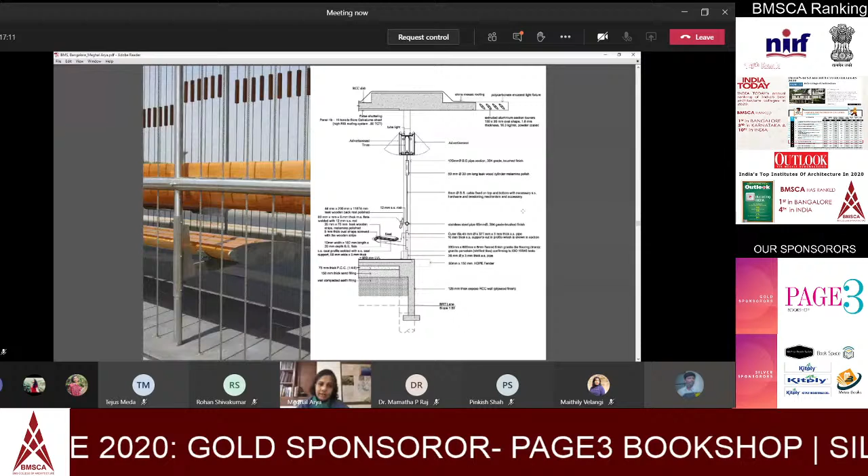One of the reasons why that happened was that, as a way to get people to accept these bus stations, we designed one as a prototype.

So we got one designed as a prototype, and while construction was going on, and after construction too, we left it open for people to come and visit. We would just sit there and talk to them, get their feel for what they had. This wasn't done as a proper scientific questionnaire, but more through informal conversations, which started getting people to try to understand what was going on. I think the informality of it made a difference in how it was accepted.

After this system is in place, where these dedicated bus lanes come into picture and the bus station is in place, you have about 180 people only on 90 square meters. So this is the kind of difference that this modal shift can make. Whether it has completely happened or not, it's a long time still. Whether we will see the whole country shift to public transport is a big question, but efforts need to be made for numerous reasons, including congestion, environment, and being able to understand ourselves not as socially segregated people but actually socially integrated people, because the BRTS makes itself available to the entire range of people in the city. We've had many elderly who are very happy because this is an at-grade system, which means they don't have to climb up the steps of the bus, but walk up the ramp and get into the bus.

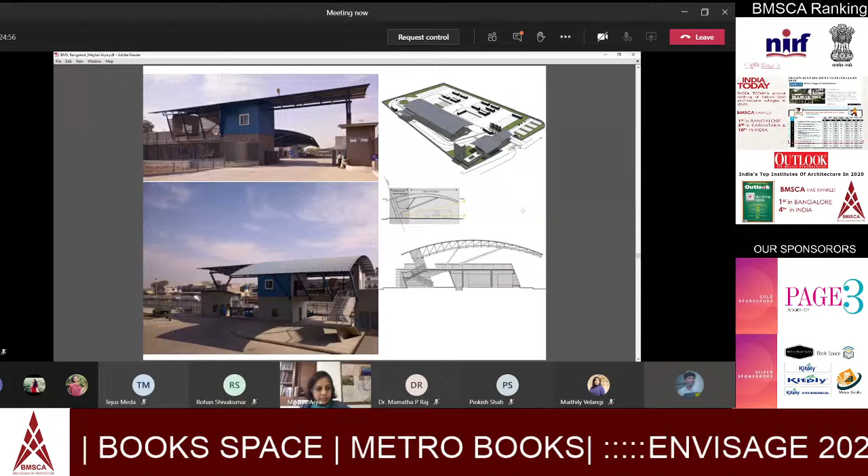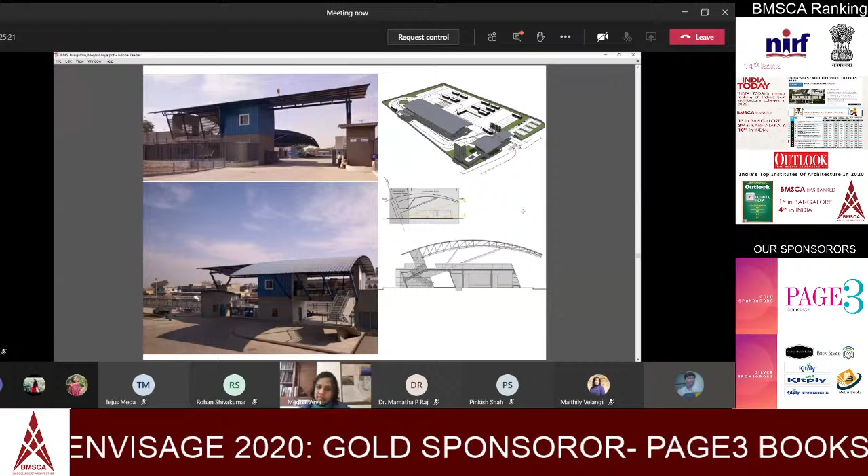The other important thing that we saw when we looked at those workshops was that the drivers have to come in very early on. They have to change into their uniforms. They have long shifts, come tired in the afternoons. Many have to come later in the evening and stay till late at night. And we encouraged drivers' facilities to be part of the program. So what you see over here is an entire set of drivers' facilities created for the drivers at Ahmedabad.

And then the drivers' facilities: lunch areas, changing facilities, an area to lie down, all of those kind of spaces, some semi-open, some covered as required.

So in Surat, in order to get that, while in Ahmedabad it was a cantilever, in Surat we created this large single span truss, and all the administrative services of the workshop were fit within the truss.

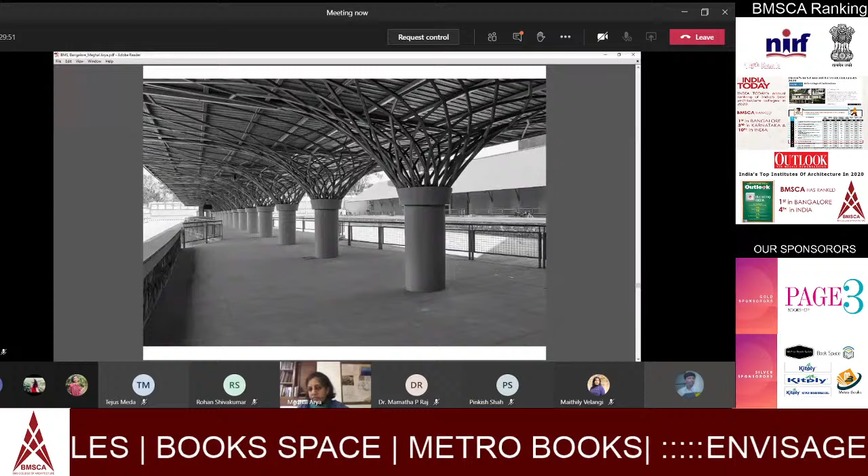So these are the arms from the main station which come out for the parking of the state transport buses. And this is the bridge which takes you to those spaces from the BRTS.

Am I overshooting the time too much? I will just run through this last one or two projects.

So this is the Veer Savarkar Sports Facility. The reason why I put this under advocacy is that in the minds of the Ahmedabad Corporation, who are the clients, this was a very simple project of providing sports facilities in the eastern part of the city.

What you see all around the sports facility are old industrial lands, and most of it is housing for the workers who were eventually laid off because many of these mills have become defunct. Mumbai has seen these kind of things too.

Now what the clients had done was this was not actually used, and it had 2 or 3 old buildings lying on it, but they were not going to be reused in any way, so they were going to pull it down. Also it was a very odd shaped site, and the clients wanted to design a simple stadium over here. What we did was to work with the program.

And to try and find a way to encourage this to become a public space, but with two different aspects of the idea of publicness.

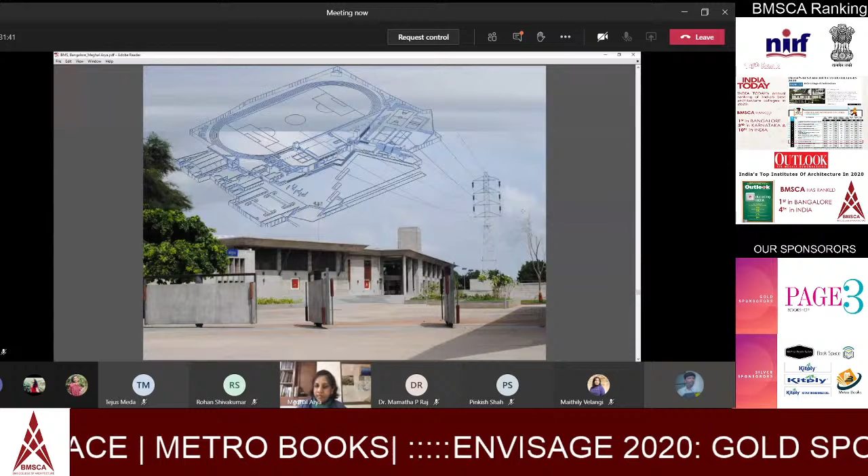On the one hand is a public space which is beyond a certain limit, which would be ticketed, so the sports facilities areas are all ticketed, but the front part we convinced them to make it into a public garden where people can come and walk at all times. This encouraged the corporation to look at this not as something which was their territory and enclosed, but to open it up.

And what it did was actually create a lot more interest in the people and a lot more usage of the space.

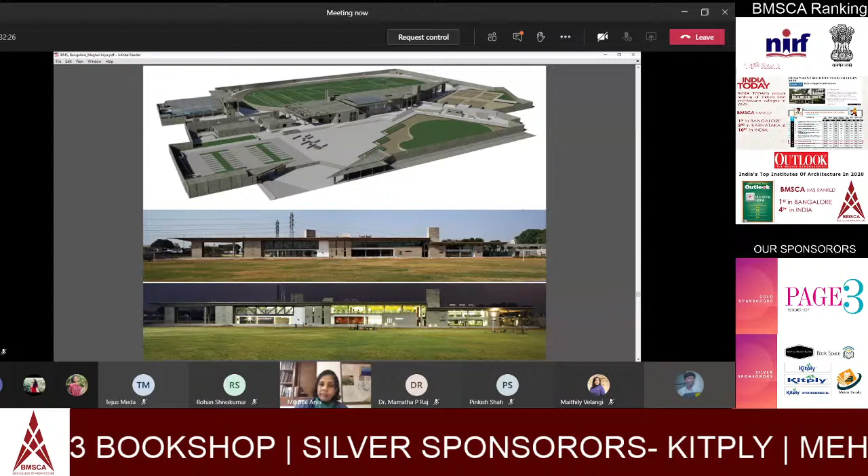This was done around 2002-2003, and at that time personal Wi-Fi and personal devices for the internet were not such a big thing. So we actually worked with them and advocated the idea of spaces with Wi-Fi accessibility, spaces for reading for the children in the neighborhood, a creche, all of those activities which were not directly related to the idea of sports, to be included within this.

And what it did was that generally sports in these areas was seen as something which belonged to the younger men, and therefore this whole space would very quickly become the domain of the younger men of the neighborhood.

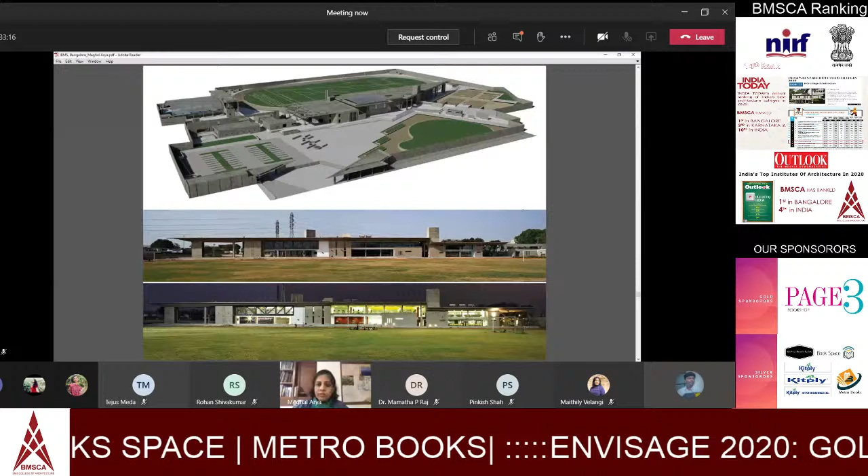But by bringing all these things within the program of this sports complex, we saw a lot of housewives starting to come with their children and use the gym and the sports facilities. We also saw a lot of elderly coming in to use the garden. So through the shifting of the program, we were able to create a space with a much wider demography than was earlier anticipated.

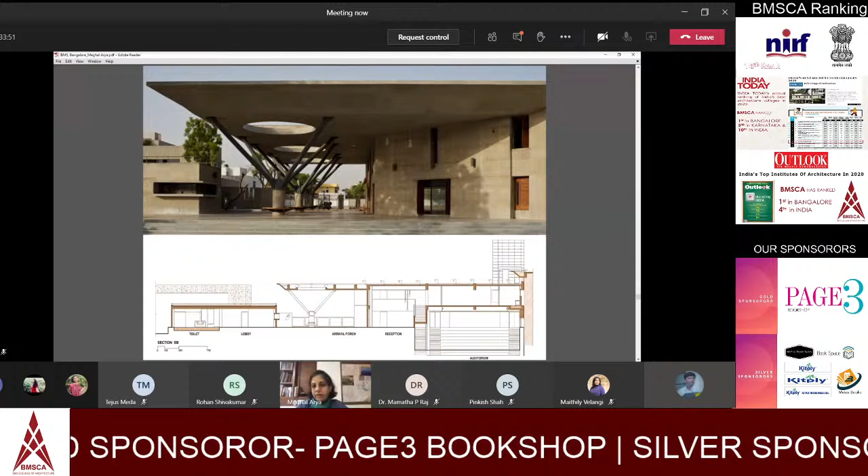The other important focus was to be able to create these open spaces like I showed you earlier in the day also. Because in public spaces, you never know how many people will actually congregate here at any moment, and we have to make space and allow for large congregations to occur. So this large, big foyer kind of space was given, which led on to the actual sports ground at the back.

With all these large spaces, there's a certain scale to this whole project, but when it gets filled up with people, architecture starts receding, as we saw in the bus stations also.

The siting of the building was also very particular because there were overhead high tension wires under which we could not construct. We needed this large open space for the field, track and field, and football. So we had to create the building in a very long and narrow space, and then articulate the diversity of functions without breaking it up too much. So there's an architectural challenge along with all the other aspects of the site and the advocacy for a high quality benchmarking of public spaces.

To the extent that this space now is actually quite coveted for political rallies. A lot of the councillors and local corporators want to use this and promote it as their contribution to the neighborhood.

This is the crash area that we created just abutting the swimming pool. It also allowed us to incorporate the existing trees within the program, otherwise we would have had to raze them to allow for the large sports facilities.

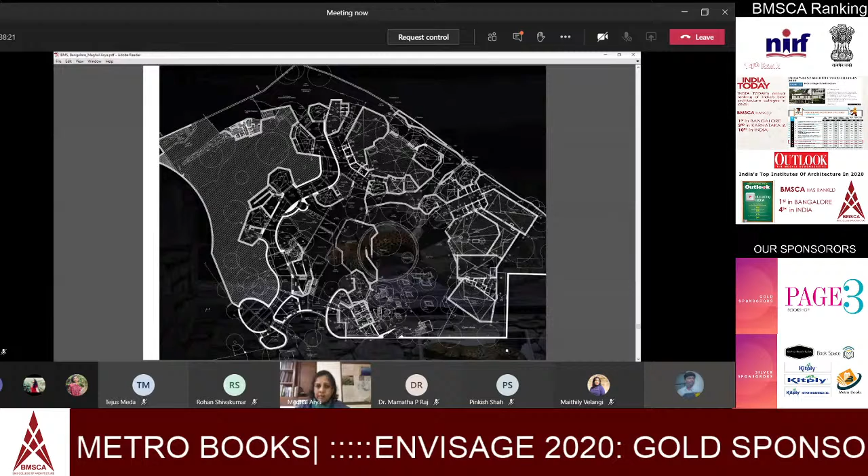The first thing we found was that there were about 100 odd trees on this site. All those little circles you see are the trees, and we managed to save 97 of them. So what we did was create these little cave-like spaces between the trees, and that is how this whole plan emerged.

We divided the nocturnal animals into three parts: the subterranean ones, the terrestrial ones, and the birds. For the first type, you enter from an egg-like space at the bottom corner, and a tunnel takes you through the spaces created for the subterranean animals. What also helped was that the site had a level difference of almost 6 meters, so we dug out this tunnel and stacked the earth to be used, with the entire tunnel created out of rammed earth.

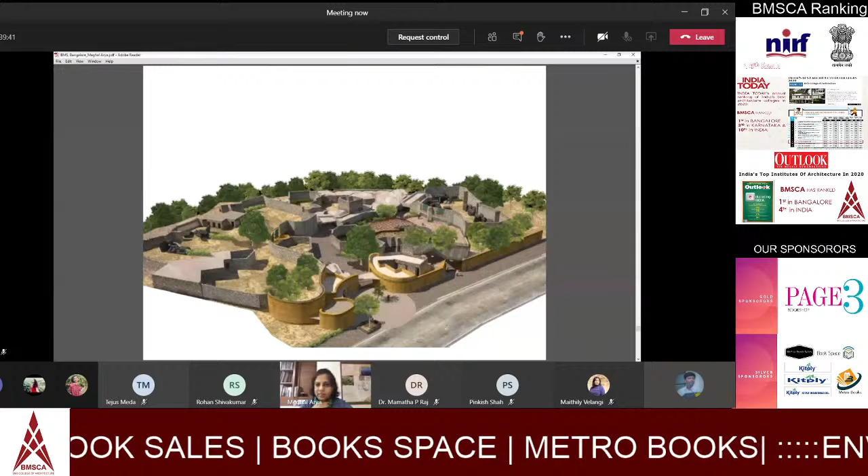So we were looking at the entire ecosystem of the site as part of the project. We've also used, as you can see, how the higher levels were dealt with, and then the lower levels. The front part was the entrance with curved walls, which brought people into the space from the lake and into a tunnel-like space.

This is the construction going on of the rammed earth, and you see the black area is where the entrance to the cave-like space is. The first space you entered was an interpretation center, and then you moved through the different enclosures.

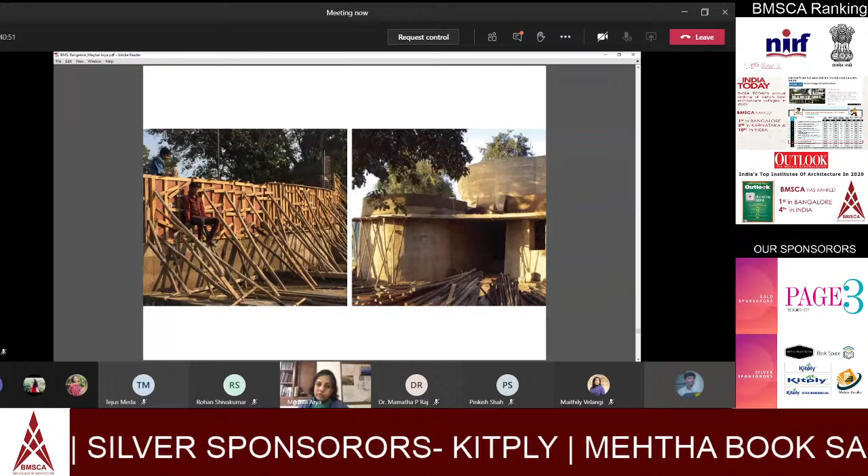Each animal, in the way we designed it, had three different kinds of spaces to inhabit. One was the enclosure which the people viewed, but much larger spaces behind that enclosure were provided for the animals to move about. So actually only about 20% is what you see from the public spaces, and the rest is used for the animals to move about behind the enclosures, with a much smaller space for them to retire at night. This diversity also reduces the boredom found among many zoo animals. We also gave more than 2 enclosures per animal, so they could be rotated between enclosures to create diversity in their lives.

A lot of this was done through intense conversations with zoologists, with the director of the zoo, and with the zoo authority, in order to get as much knowledge as we could, and to create an environment that responds to and creates a sense of education for the people rather than mere viewership.

So this is the entrance. These are the ticket windows. All this earth was from the site, and the rest we couldn't use earth throughout the site because many of these nocturnal animals, like porcupines, have very sharp teeth and will actually dig through the walls. So we had to use stone, and we created caves through the use of stone.

What we've done is in this space... Meghal, could you just move a little faster? We have the next workshop in 2 minutes, so we'll have no time for Q&A otherwise. Okay, yeah, so just run through the last few pictures.